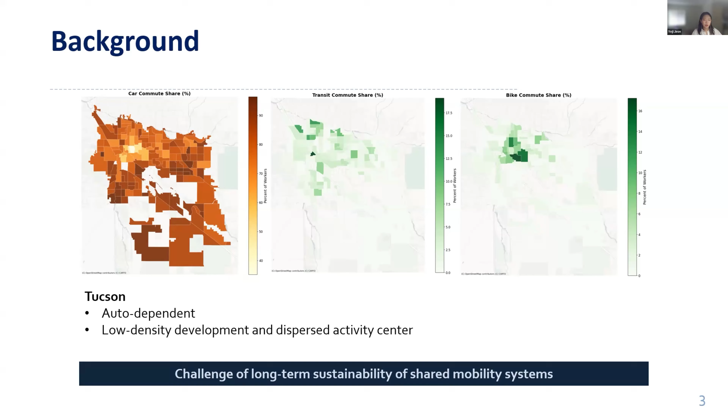So relative to this, we can see that our city is characterized as very auto dependent, and we have low density development and dispersed activity centers. When I want to go somewhere, it usually takes like a 20 minute drive. So we can see it's a really low density development city. So this brings up a challenge of long-term sustainability of shared mobility systems.

And then we did some literature review on how other studies have explored this new pricing plan, especially casual pricing plan introduction. And we found a research gap: prior studies were mainly focused on economic benefits and immediate travel behavioral effects of pay-as-you-go using simulated or survey trip data. And after we reviewed our data, we found we can contribute by examining the impact of pay-as-you-go on user loyalty using observed data, reflecting sustained service participation by using each person's trip history.

So to do this, we have to collect different data sources, because we do not only want to measure just the pay-as-you-go introduction, but we also wanted to see other different attributes. So we got this multi-source data, and we categorized it into three different factor categories. First is internal factors, which are more about operational factors.

The first variable is whether the user was introduced before pay-as-you-go was there or not. The second one is the history of their travel before COVID. Then we wanted to see the average trip cost, and whether the person ever used a subsidy-based pass type. The second category is geographic built environment, such as multimodal accessibility.

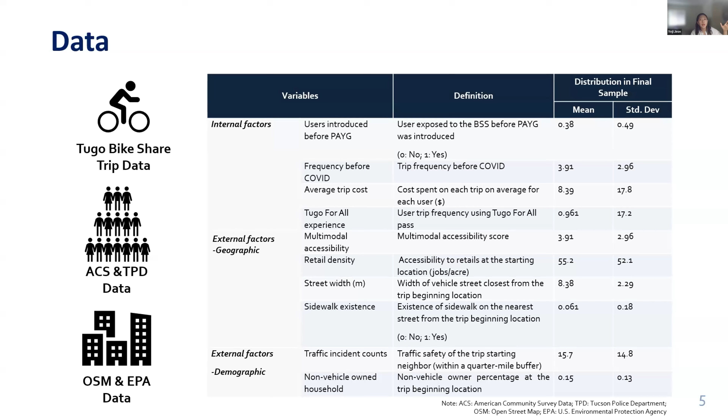So with this, we ended up with these variables, but when we first initiated the data set, we had around 200 variables. We tested with the p-values and then selected this set of variables as statistically significant variables. With this data, we first wanted to see what the pattern and the overall data look like. First, we looked at the monthly pattern of trips and user counts.

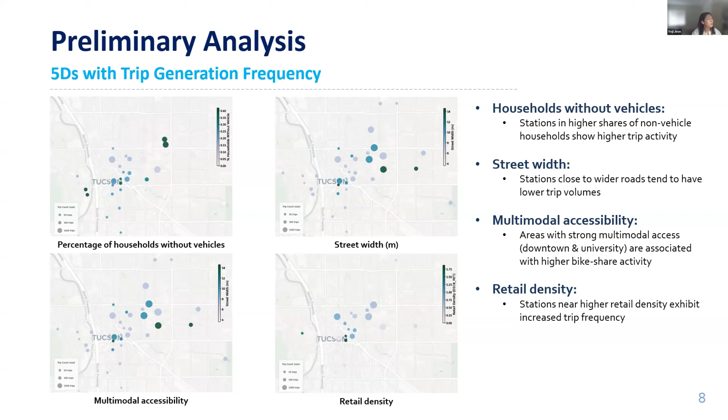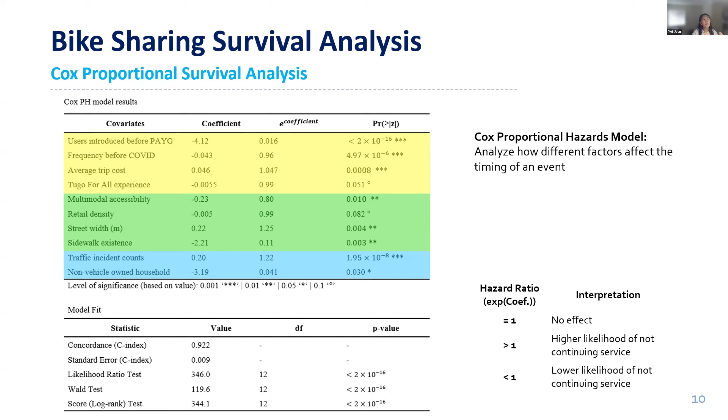So in conclusion, our research contributed by introducing user retention as a key outcome compared to the immediate effect of a new pricing plan introduction. We wanted to see more of user retention, how people survive, by observing their travel history. And in bike-sharing policy evaluation, using the Cox proportional hazards model with integrated multi-source data.

And we found that users who joined before pay-as-you-go was there tend to show more sustained usage. They were more likely to survive inside bike-sharing systems. And pay-as-you-go effectively attracted new users, but mainly functioned as an entry mechanism. However, although that part is still small, we saw the potential that pay-as-you-go introduced users were actually becoming long-term users. So we still see the potential, and it successfully attracted new users.

And by examining different factors in different categories, we found that operational, demographic, and built environmental factors should be integrated together to encourage sustained bike sharing usage.

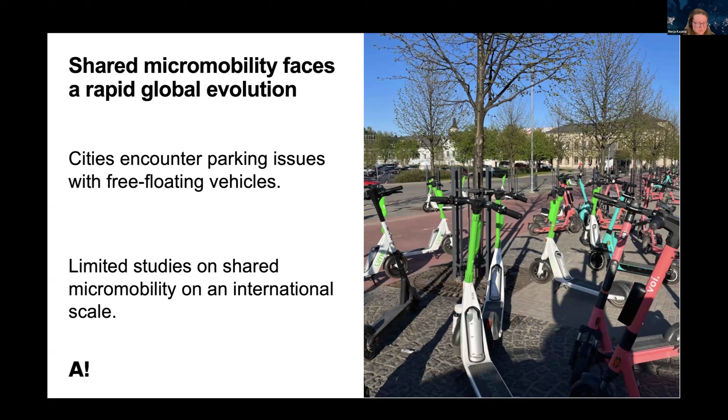There are limited studies on shared micromobility on an international scale. Our study tries to get a better understanding of this evolution of shared micromobility and its relation to technological diversity. We try to analyze and identify what trends are emerging internationally in different markets, and also see what similarities and differences exist between these micromobility services in different countries.

Let's first take a look at the key components in the shared micromobility ecosystem. First, there is an operator that manages one or more micromobility services in specific regions — that can be a municipality, an urban area, or even a nationwide area. A micromobility service in a specific location may offer one or more vehicle types to be rented, and these vehicles can be parked in, for example, docking stations, or they can be free floating, or some kind of hybrid form.

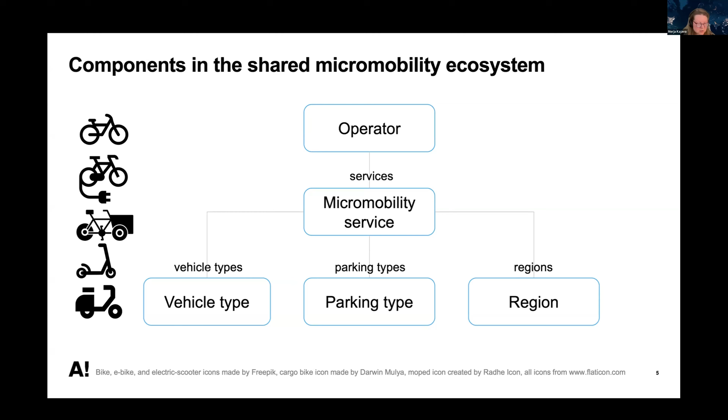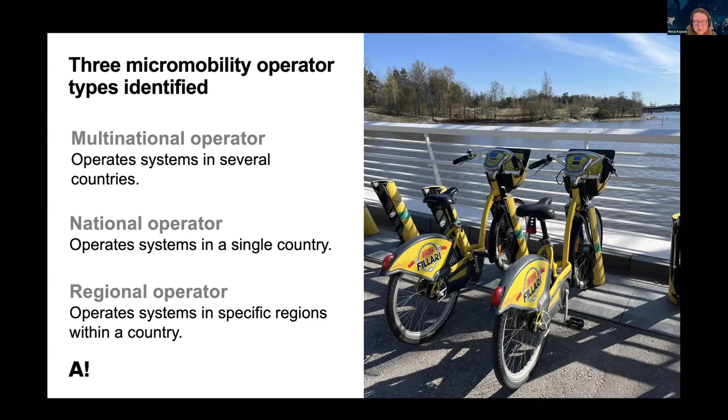First, the multinational operators that manage systems in several countries, and in this dataset, even in several continents. Then we have national operators which operate systems within a single country. Some national operators are affiliated with railroad companies, for example in Germany and the Netherlands. And the regional operator manages locally in a specific region, and this is the largest number of operators in this dataset.

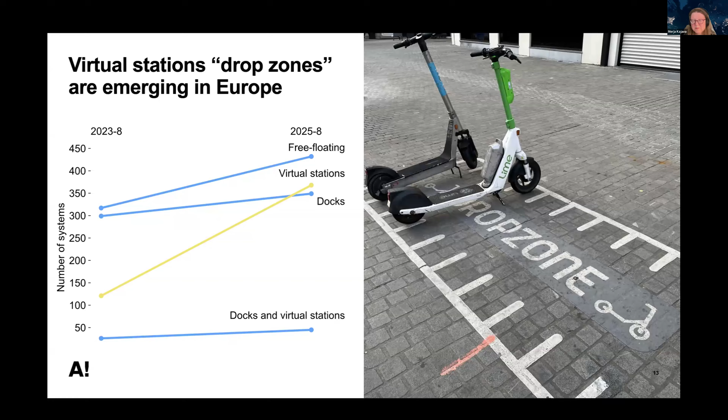In summary, the technological diversity is increasing when considering the vehicle types, with bicycles, e-bikes, e-scooters, cargo bikes, e-mopeds. Some systems even had hand bikes and tricycles. And the parking types are now not only the docking stations or free-floating vehicles, but now the virtual stations are one possible way of managing the parking.

As a result of this study, we have a couple of policy recommendations, for the public and private stakeholders. When planning a tendering process, cities could also consider additional vehicle types, such as cargo bikes and e-bikes. Cargo bikes especially for household last mile logistics, and e-bikes for longer commuting trips.

And the virtual stations provide a very cost-effective way to reduce parking issues in city centers. This was also taken this summer in Oulu, and you can now see that the virtual station has really improved the parking situation, so it's possible to cycle again on this cycle lane.

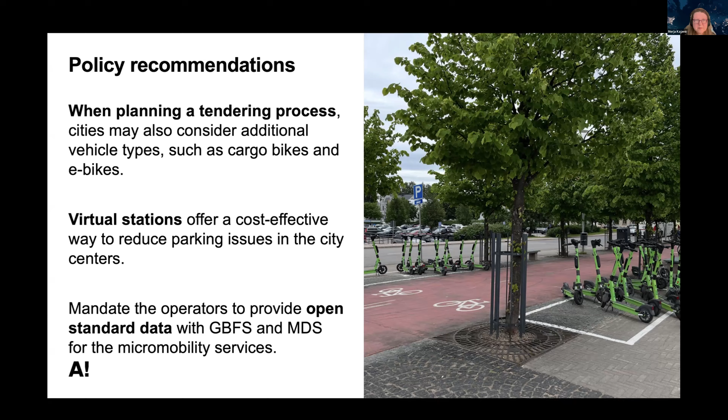Thank you very much, Marja, for your presentation. We have a question in the chat: is there any evidence of increasing numbers of adaptive shared use bikes for people with disabilities?

This is a very good question. It was actually surprising to find that shared micromobility systems even provide hand bikes, which means you can add an extra bike in front of your wheelchair. But this is very marginal right now, though it may be slowly coming into place.

Thank you. Is there any other questions? You can raise your hand and ask the question or put it in the chat. So I have two questions. Thank you very much, because this comparison between different countries is interesting.

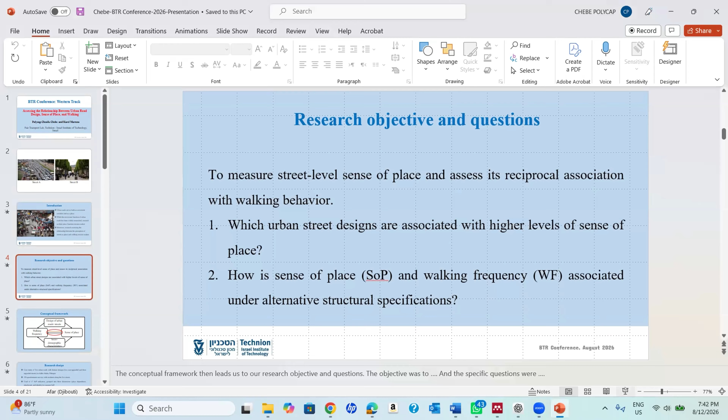I don't know whether you can see my slides. Yes, it's okay. Please go ahead. Hi to everyone, I'm Polycap Chebe, a PhD student at the Technion Israel Institute of Technology under the supervision of Professor Karel Martens, who is also co-author of this presentation. I will be presenting on the topic of assessing the relationship between urban road design, sense of place, and walking, which is part of my PhD research.

Now back to my research. As we all know, urban roads serve both as movement corridors and as places for socialization and other economic activities, and in most cases the design of urban roads will determine which of these functions is prioritized. From research, we were made to understand that while there is large-scale research on how roads serve as mobility corridors, there is limited research on how roads function as places.

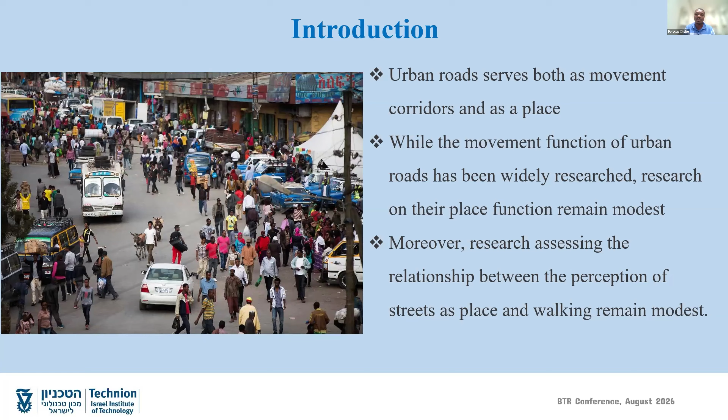This background was very important to us in framing our research, which seeks to measure street level sense of place and assess its reciprocal relationship with walking behavior, with two questions: first, which urban street designs are associated with high levels of walking and sense of place; second, how is sense of place and walking frequency associated under different alternative structural specifications.

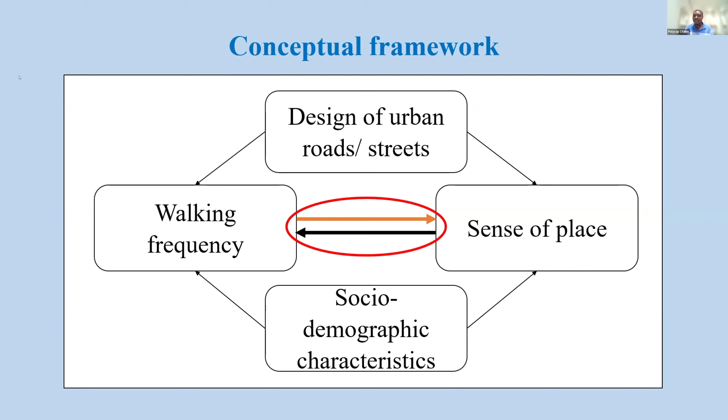From these questions, we came up with a conceptual framework showing that the design of urban roads influences both walking frequency and sense of place, while controlling for socio-demographic characteristics. Research has already shown an association from sense of place to walking frequency, but the question is whether walking frequency is also associated with sense of place.

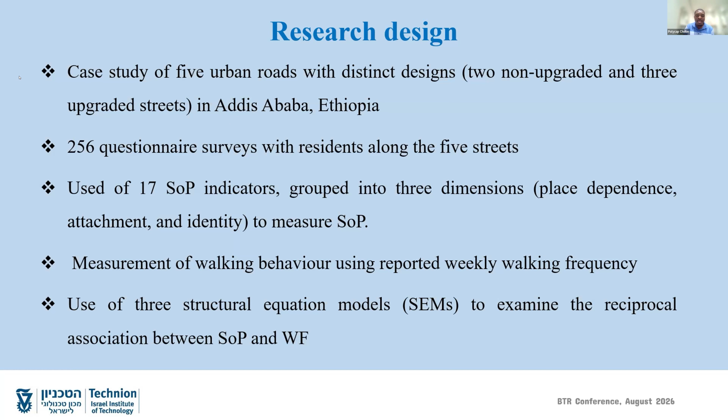To address this, we adopted a case study approach of 5 urban roads in Addis Ababa, 2 non-upgraded streets and 3 upgraded streets. We conducted a survey with over 256 respondents living along the 5 streets. We used a 17-scale sense of place dimension grouped into 3 dimensions: place dependence, place attachment, and place identity. We measured walking frequency in terms of reported weekly walking frequency, and finally used 3 structural equation models to examine the reciprocal association between sense of place and walking frequency.

For the first model, we specified sense of place as a first order dimension with 3 variables - place dependence, place attachment, and place identity - directly estimating walking frequency while controlling for street category, included as a proxy for land use activities, and socio-demographic characteristics.

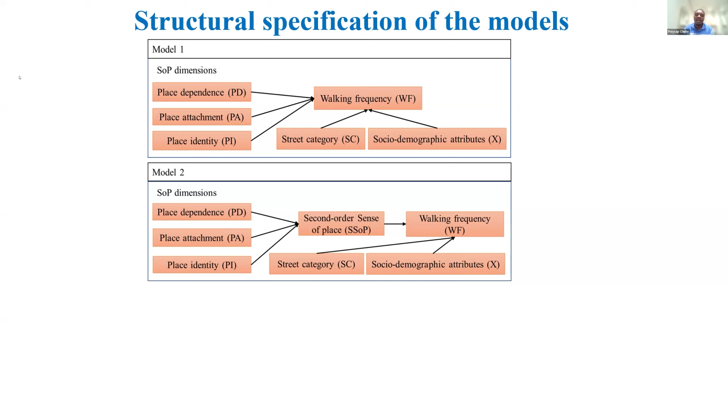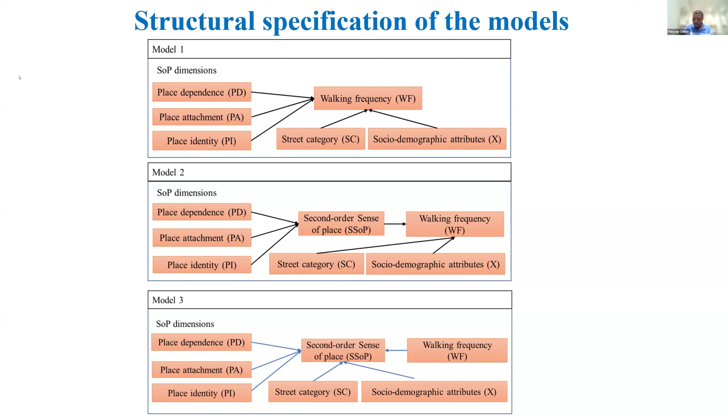In the second model, we specified sense of place as a second order latent variable estimating walking frequency, still including street category and socio-demographic characteristics as control variables. In the third model, we reversed the structure by looking at the association from walking frequency to sense of place, still controlling for street category and socio-demographic characteristics of the respondent.

For the sense of place tool, we had 3 measurable dimensions: place dependence with 5 indicators, place attachment with 6 indicators, and place identity with 6 indicators. These indicators were drawn from existing literature, particularly the work of Jorgensen and Stedman, who have widely researched sense of place, along with other associated studies.

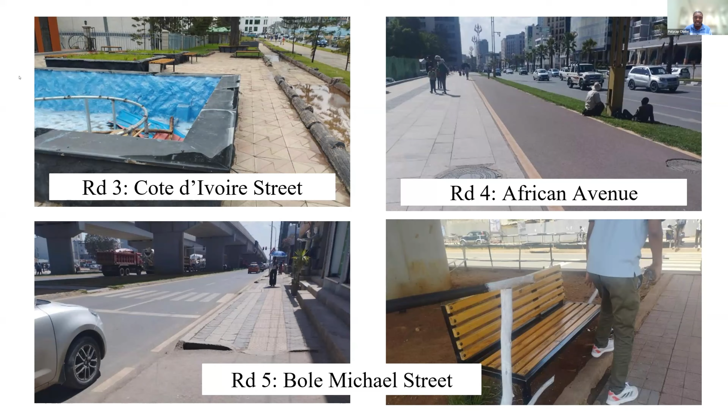For the upgraded streets, we had 3: Côte d'Ivoire Street, locally known as Megenagna; African Avenue Street, locally known as Bole Street; and the Bole Michael Street, which was recently upgraded with a flyover section and some chairs provided underneath the flyover.

For the descriptive analysis results, we first observed significant variations in sense of place score across the different selected streets and neighborhoods. But looking closely, we found no significant variation in sense of place score between each street and its associated neighborhood.

Among the different streets, the one with the highest sense of place score was African Avenue Street, an upgraded street. Interestingly, the street with the lowest score was also an upgraded street, Côte d'Ivoire Street. For the 3 dimensions, place dependence consistently scored lower compared to place attachment and place identity.

For walking frequency, we observed that there were no significant variations in walking frequency across the five streets.

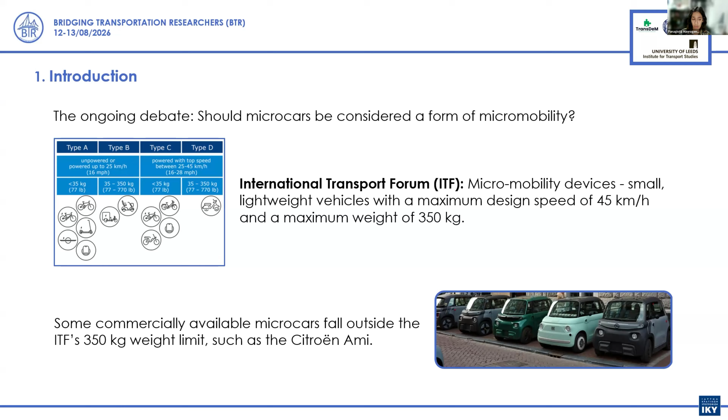There's an ongoing debate on whether microcars should be considered a form of micromobility. According to the International Transport Forum, micromobility devices are lightweight vehicles with a maximum design speed of 45 kilometers per hour and a maximum weight of 350 kilograms. Most famous commercial microcars, such as the Citroën Ami or Microlino, fall outside of the ITF's weight limit. However, there are others, less known, that meet or closely align with these thresholds, supporting the inclusion of microcars in the micromobility definition. You can see in the table 4 examples with the weight, the maximum speed, and the seats that the car has.

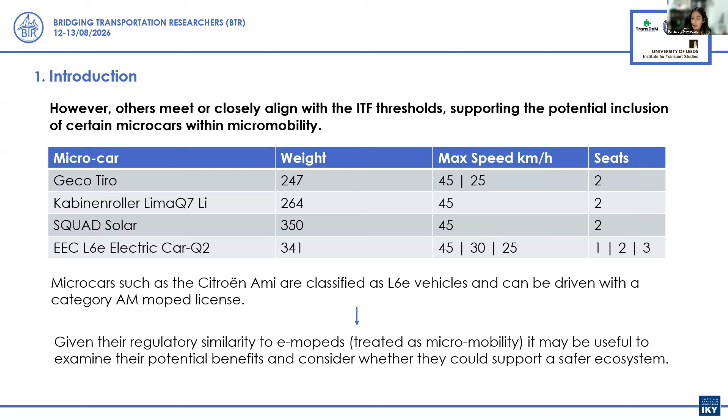In addition, even the most famous microcars that fall outside of the threshold, such as the Citroën Ami, are classified as L6E vehicles and can be driven with a moped driving license, not a car driving license. So, given that some microcars fall into the ITF definition of micromobility, and their regulatory similarities with mopeds that are already treated as micromobility, we considered that we should examine the potential benefits of including microcars in the wider definition of micromobility, and examine how microcars could help support a safer ecosystem.

This work also focuses on mobility hubs. A mobility hub is a clearly identifiable area where different public and shared transport modes are brought together and connected to increase accessibility and improve users' experience. In our case, we defined micromobility hubs as permanent, designated areas that integrate shared micromobility services with public transport. So we exclude services such as car sharing, ride-hailing with Uber, for example, or taxis. We focus on short distances and first and last mile connectivity, and we examine users' evaluation of micromobility hubs as a distinct system and not as a component of a wider mobility system. We examine how infrastructure, safety, and users' characteristics jointly influence users' mode choice, and users' preferences and trade-offs relevant to the design and implementation of such hubs.

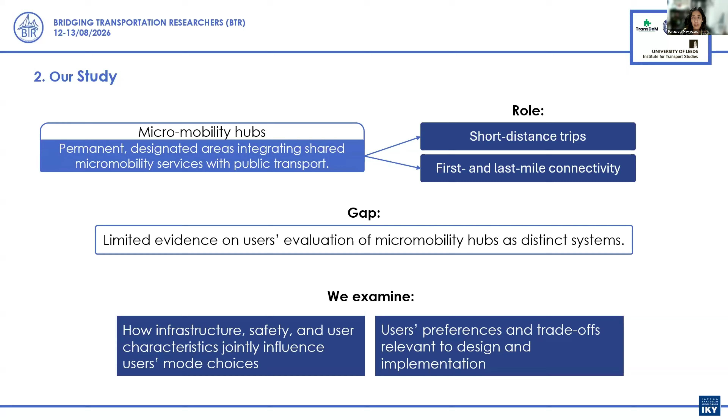Our study started, of course, with a literature review in order to identify gaps, define the research question and the survey design. We proceeded with the survey design, in which we included stated preference experiments, a travel behavior diary, perception and attitudes, and of course demographics.

In total, we used 3 different data sets for our model. We used the survey data, some OpenStreetMap data for cycling infrastructure data, and road accident data. All these 3 components were combined into our final model estimation.

For our stated preference experiment, at first the scenario was presented to the respondents. More specifically, we showed them the trip purpose, the weather conditions, and the area and the speed limit for their area. And we asked them what mode they would usually use for such trip. And then we also asked them whether they would consider using a micromobility hub for their trip.

Those that responded yes were shown the Micromobility Hub choice task, while those that responded no were shown an alternative choice task that was related to public transport services and some shared services in the city. So this process was repeated across all 6 choice scenarios, resulting in some individuals answering more Micromobility Hub scenarios and fewer public transport scenarios, and others the opposite.

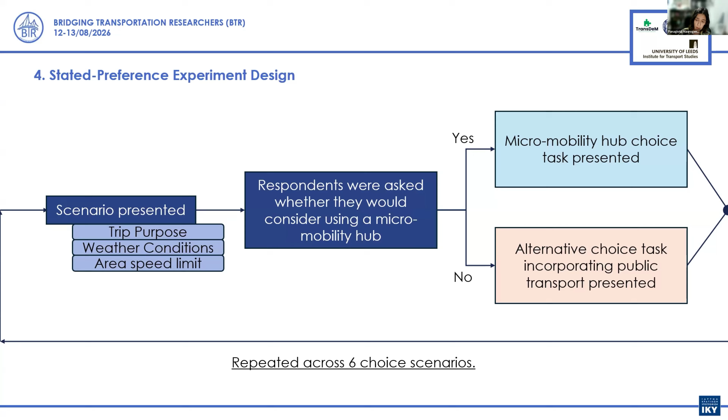In this presentation, we focus only on the Micromobility Hub choice task, and the public transport choice task is not examined at all. Here you can see the attributes of the Micromobility Hub experiment. We examined waiting time, travel time, walking time to the final destination from the final station, cost, bike lane existence in the trip, charging level of each vehicle, and some additional features such as the provision of helmet, SOS buttons, etc.

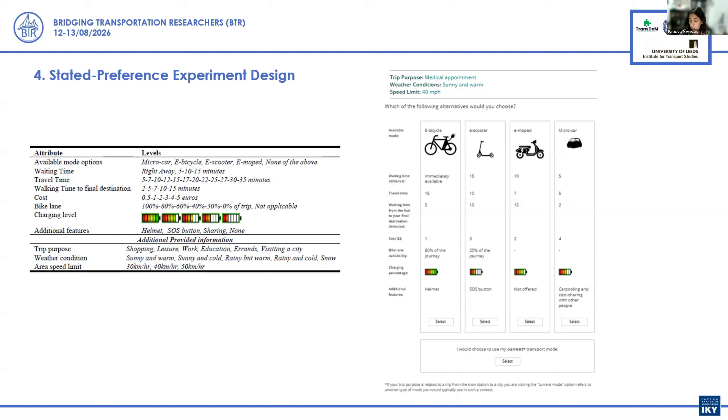And also for the additional provided information that was shown in the beginning and was fixed for all modes: the trip purpose, weather, and the speed limit. You can see for trip purpose, we examined shopping, leisure, work, education, errands, or visiting a city. On the right, you can see a screenshot from our stated preference scenario. In the final option, people could actually say that they would choose their current transport mode.

So in the end, we collected 500 questionnaires, 500 respondents. We used quotas on age, gender, region, and income. For the hub stated preference scenario, we had 346 respondents participating in at least one scenario, answering that they were open to use a Micromobility Hub in at least one of the scenarios presented to them, and in total we had 1,387 choice observations. Gender and age, you can see in the diagrams, follow the UK distribution since we did use the quotas for these variables.

75% of our sample were employed, only 6% of our sample were students. You can also see the distribution of education, with 34% holding a university degree. And you can also see the distribution of our sample in different regions that also follow the UK distribution due to the quotas used in the survey. We also asked them about their physical activity. You can see that 65% did state that they exercise often during each week.

And we included some indicators on Micromobility Hub attractiveness for each respondent. Some statements about whether they believe a Micromobility Hub will help with the economy, the sustainability of the area, parking spaces, safety of pedestrians and cyclists, accessibility and connectivity. The scale was from 1 to 6. You can see that most of the answers are around 5, closer to 5, closer to 4.5. So the opinion was quite positive.

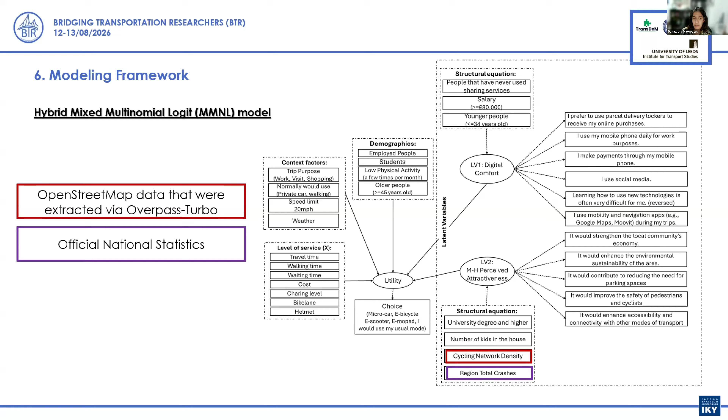And for our 2 latent variables, the structural equation for the digital comfort latent variable was related to previous shared service usage, salary, and age, while for the perceived attractiveness, university degree, the number of kids in the household, cycling network density in your area, and the regional total crashes. For the cycling network density, we utilized OpenStreetMap data extracted via Overpass Turbo, while for the regional total crashes, we used official crash datasets from the official national statistics of the United Kingdom.

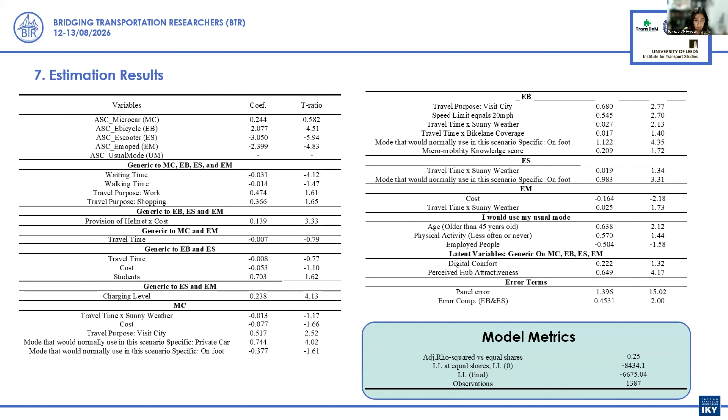To have a more complete presentation, I've also added the model estimation table. The rho square for our model was 0.25, and the observations, as I said before, were 1,387 observations. If anyone wants to return to this table, we can return.

I'll make a cleaner slide later. Also, the latent variables, metrics about the latent variables, the measurement and the structural equation parts of its latent variables. So for a cleaner presentation, I'll present the results in this slide. If anyone wants, we can show the previous slides again. So waiting time reduces the likelihood of choosing all hub modes.

Travel time showed the expected negative direction, but wasn't statistically significant. Helmet provision was positively influenced when considered alongside the cost of the trip. Higher charging level increased the preference for e-scooters and e-mopeds. Older respondents were more likely to return to their usual mode of transport, while visitors to a city were more likely to choose a microcar or e-bicycles.

Something alarming that came up from our model: as I said when I was describing the stated preference experiment, in the beginning we presented them the scenario and asked them what mode they would normally use to perform that trip in their usual life. Respondents who would otherwise walk were more likely to choose e-bicycles or e-scooters, which is quite alarming since we don't want to shift short walking trips towards motorized modes. So hub design and implementation should carefully address the substitution risk, and it's worth further examination.

Hello, everyone. Hello. Hello. Glad to... oh, that's the wrong one. I thought I had it all ready to go. Fortunately, we have saved some time with the previous presentation, so don't worry. It's filling up my screen, so I can't find the... Maybe Saurav can share your presentation, and you can ask him to change the slides whenever you want. There, I've got it here. Okay. It's just that when Zoom is on, Zoom covers part of my desktop, so I can't see. Okay, now it should be good, right? Yes, perfect. Thank you.

All right. Hello, everyone. I'm Peter Furth from Northeastern University. I did this research together with a PhD student, Nathan David Obeng-Amoako, who's also listening. We're looking at level of traffic stress now at intersections, which includes some interesting dual graph network modeling.

Where we do this research, I think everybody who's involved recognizes that getting people to ride bikes as an everyday way of getting around is good for people, good for the planet, good for cities, for the reasons I've shown and many others.

But in most places, the main thing that stands in the way of people using bicycles every day is traffic. Automobile traffic makes it stressful and dangerous to ride a bike.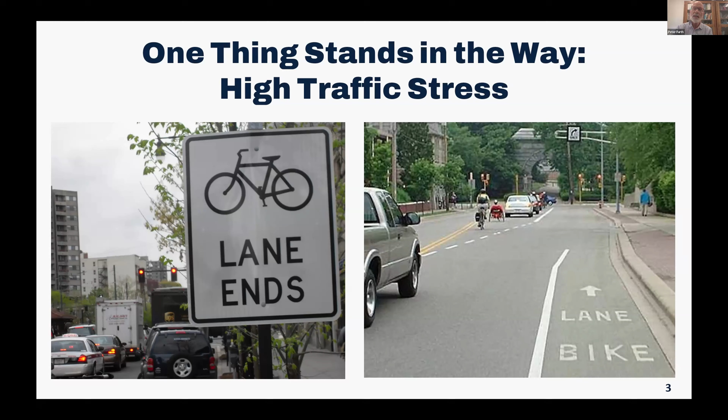So to help understand this and research it more, a little over 10 years ago I developed level of traffic stress as criteria: low stress, and levels of traffic stress 1, 2, 3, and 4. Level of traffic stress 1 is meant for children and some adults, where you don't interact with cars at all, except at crossings like driveway crossings or intersections. Level of traffic stress 2, which most adults can handle, you have your own space and don't really have to interact with fast-moving traffic. Level of traffic stress 3, you have your own space, but now you're dealing with faster multi-lane traffic. And level of traffic stress 4, you're thrust into mixed traffic on a multi-lane or high-speed road.

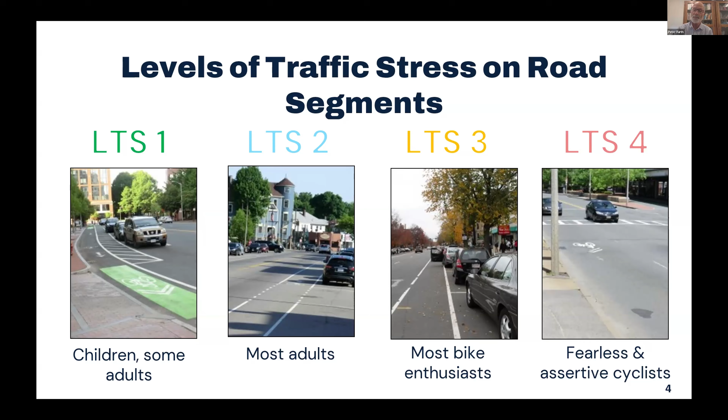And not many people are willing to do that.

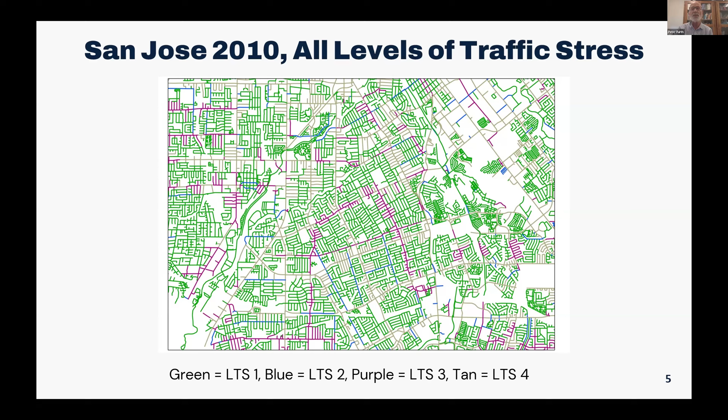Looking at traffic segments in our past research, classified by the 4 levels of traffic stress, here's a map of part of San Jose, California, showing different levels of traffic stress according to color. If you're willing to ride on all 4 levels, the whole city is yours—you can ride anywhere. But if you aren't willing to ride where the level of traffic stress is 4, and I erase that level, that's the network you have. Now you start to see gaps—islands you can't get from to anywhere else in the city unless you're willing to ride on that level of stress 4.

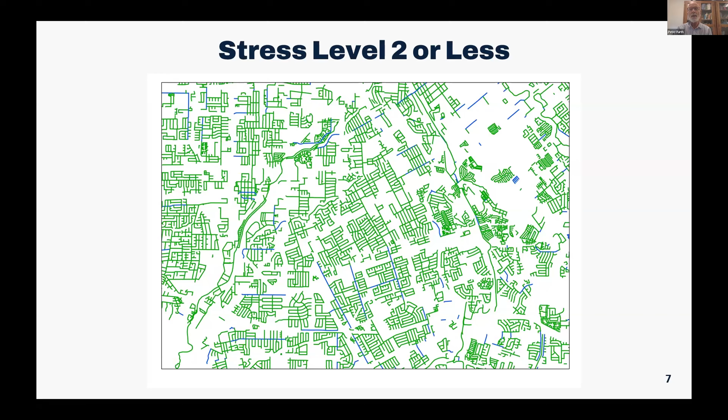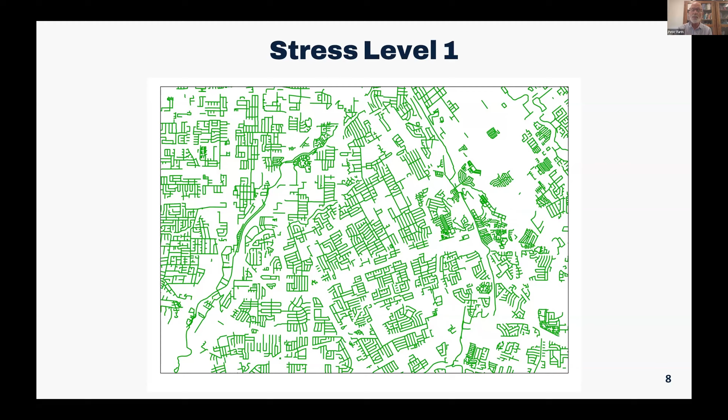If you only want to handle level of stress 2, the gaps and islands become more severe. At level of traffic stress 1, even the most... you can see, all over the city, what can you do? You can leave your home, ride around a couple streets in your neighborhood, and just go right back home. You can't get anywhere—your accessibility to destinations is almost zero.

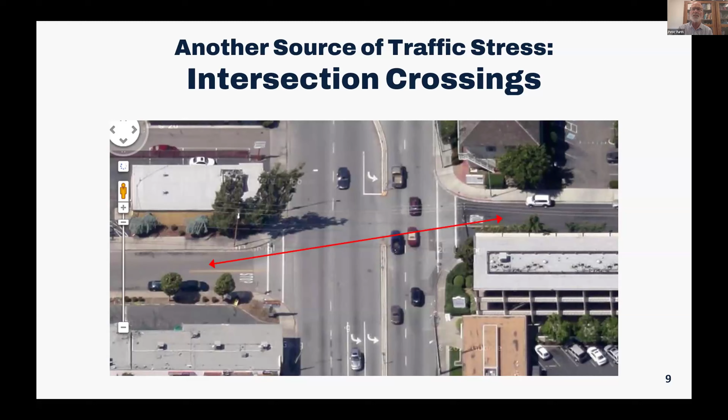So we wanted to do a more systematic study of how intersections have traffic stress. The three research tasks we took on are: first, we need criteria for intersection traffic stress—what makes a crossing level of traffic stress 1, 2, 3, or 4? Second, we need a network analysis that accounts for stress at intersections, because most networks put the cost, the stress, on the links, not the nodes—but intersections are nodes, so how can we account for that? And third, in case studies, we want to answer just how significant a barrier intersection traffic stress is. If you've already accounted for segment traffic stress, how much of a difference do intersections make in keeping people from having a low stress ride to their destinations?

So first, on to the criteria. At intersections that are signalized, the crossings are pretty easy—in my country anyway, in the United States, most places where there's a signalized crossing have a provision that makes it safer for pedestrians to cross, and if pedestrians can cross, usually bikes can too. But there are still some conditions under which it's higher stress, and we call those triggers. The first one is crossing distance.

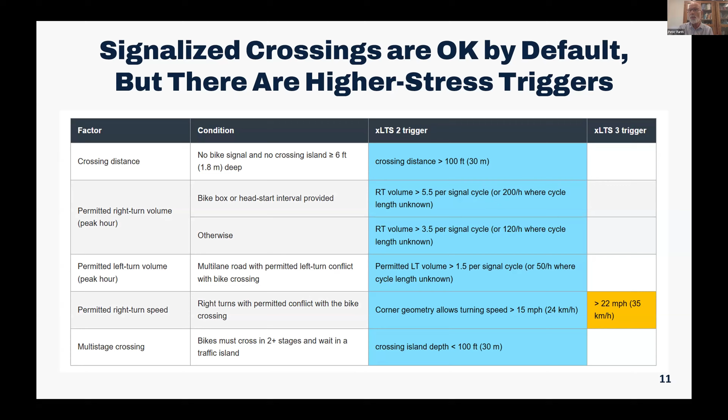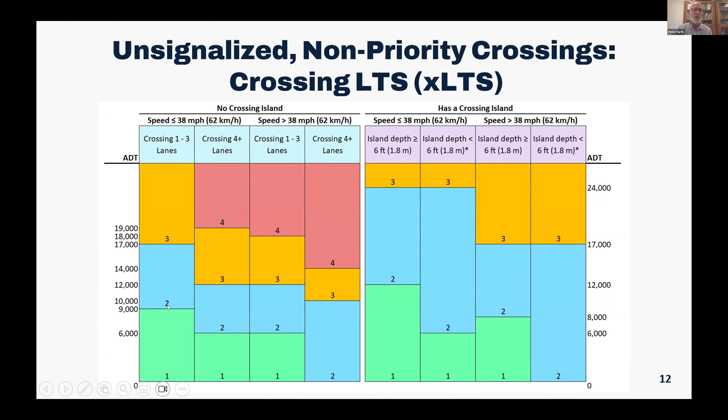To come up with the parameters for these crossings, we didn't do a behavioral study asking people about their feelings of stress—there are problems with doing that, and we didn't have the budget. Instead we used a gap acceptance model that allowed us to have consistent parameters. We looked at three user classes: children, most adults, and bike enthusiasts. They have different speeds, different startup offsets, different tolerable post-encroachment times. The gap acceptance model gave a maximum average delay, and we imposed a limit, which gave us consistent criteria. Stepping back to the previous slide, that's how we came up with these volume limits—acceptable under certain conditions for level of traffic stress 1, whereas if you're over 9,000 cars a day, you're up at level of traffic stress 2, and so on.

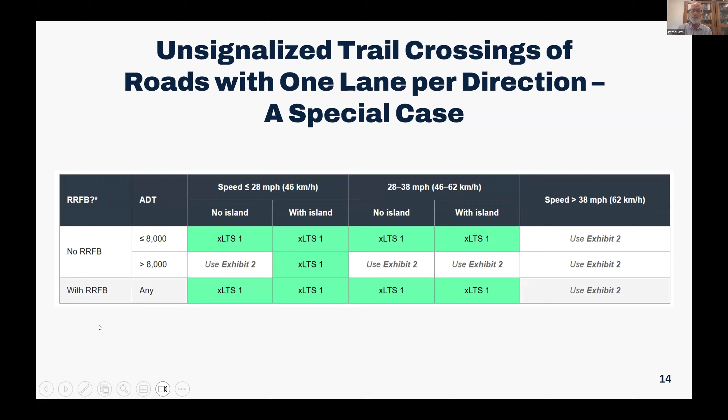Another special case: when there are trails—meaning a bike path not alongside a road but completely on its own—crossing a road, you can get a pretty low stress crossing because cars will stop for you if the speed is low enough. It depends on speed, whether there's an island, the traffic volume, and whether there's a rectangular flashing beacon. Those were most of our criteria.

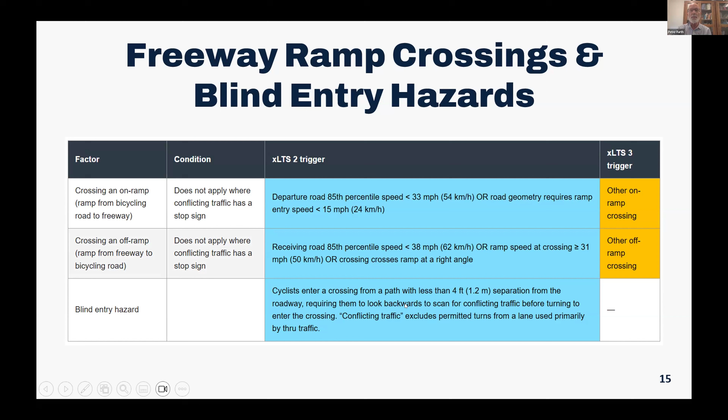Then there are some special cases for freeway ramp crossings. Everybody understands when you're riding on a road and suddenly there's an on-ramp to a freeway—cars just zoom across. It's so stressful crossing those, so crossing on-ramps and off-ramps are triggers. There's also a trigger from a blind entry. Here along Saulsbury Road, there's a bike path, but because it's right at the curb, when you turn to enter the crossing you don't have a chance to see conflicting traffic except by looking behind you. Looking behind you is difficult, and people lose their balance or fall when they do. So I call that a blind entry, and it makes for a higher stress intersection.

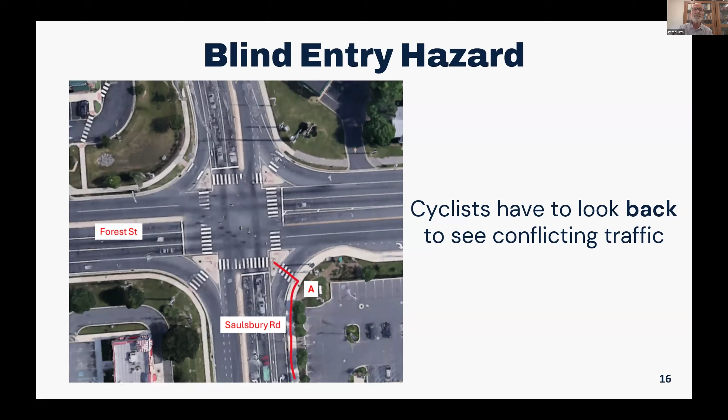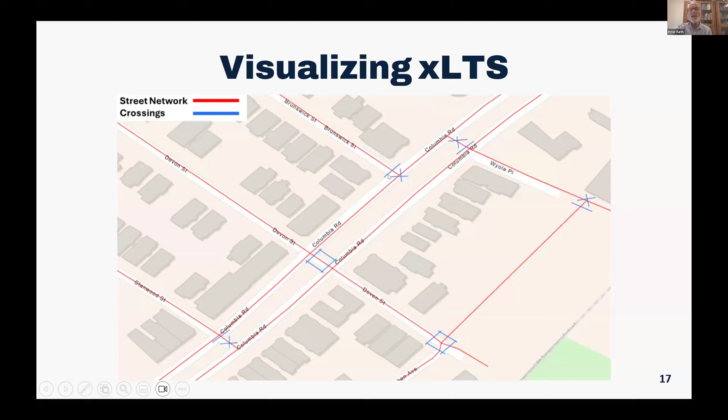At a 3-leg intersection, you see here the 3 crossings. This is the crossing across the bottom of the stem. There is no crossing across the top of the stem, so there's no crossing there. And then what makes an X here, these are the crossings associated with the left turn that you would make going into or out of the side street.

But when it comes to a network analysis, we distinguish crossing stress, X LTS, from movement stress. Movement meaning like a turning movement. So a crossing stress is the stress of crossing a particular leg, whereas a movement stress is the stress associated with making a certain movement. So for instance, at this intersection, when you're making a right turn, you're not crossing anything, so there's no stress making the crossing.

If you're making a through movement, like this through movement going north, you'll be crossing leg 3. So the stress of that movement is the same as the stress of crossing leg 3, which is entirely dependent on characteristics of leg 3, like how many lanes it has, how much traffic it has, whether there's a traffic light, and so on. If you're making a left turn, like the left turn shown here with the purple arrow, you're now crossing 2 legs.

We assumed left turns are made going around the intersection, kind of square, going counterclockwise, like shown here. In other words, cyclists are making a two-stage turn. They have to cross leg 3, then they wait if necessary, and cross leg 0. So they have crossing stress on the first leg, and some crossing stress on the second leg, and the stress of the movement is the maximum of those two, consistent with the way we've done traffic stress on segments.

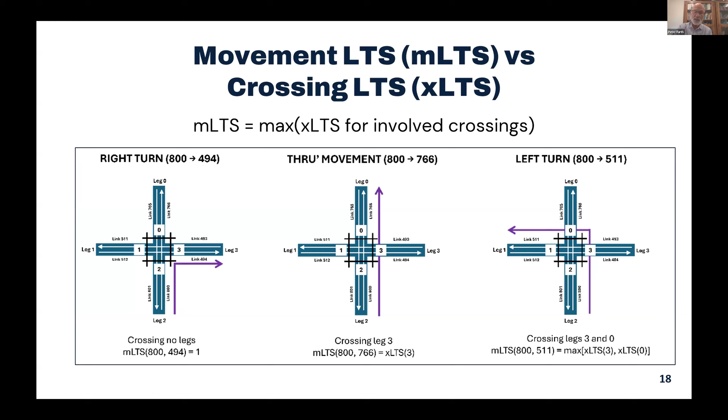Then, in order to get the stress of a movement at a node, which in a usual graph representation has no cost, you can't put a stress or a cost or a restriction at a node. But there is another way of doing this, which is a dual graph representation, which is used in routing for automobiles. It's been used in routing for public transportation, so it can also be used with bicycling.

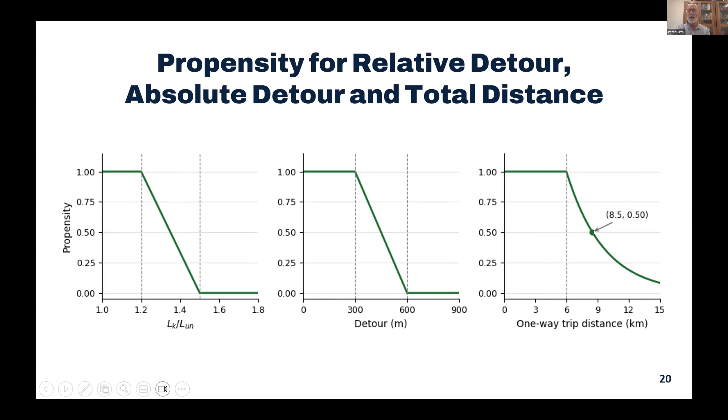For short distances, people are willing to go on a detour of 300 meters, and completely unwilling to go a detour of more than 600 meters, unless it meets the relative criteria, then for longer distance that's okay. And for distance, people are willing to go with no diminution in propensity for up to 6 kilometers, and after that propensity declines with an exponential decay with a half-life of 2.5 kilometers.

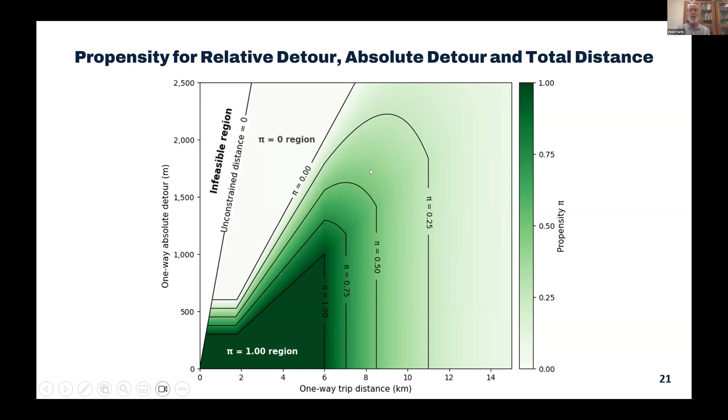We applied this to looking at accessibility to jobs in Boston. We already had, for Boston, a level of traffic stress for segments. So we got all the data we needed to calculate level of traffic stress for every crossing. We then took that to the next level to get the level of traffic stress for every movement. We created background movement links, and then we created the dual network.

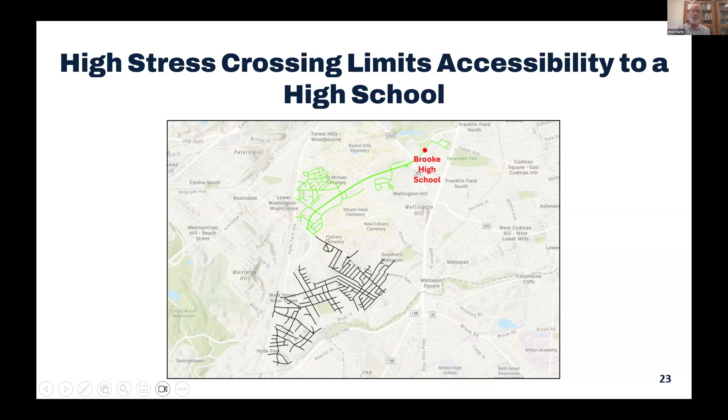But in green, you do have low stress accessibility, and in black, you also have low stress accessibility if you ignore crossings. But there is a crossing where the black and green meet that you'd have to make to get to Brooke High School and back home again if you lived in the southern neighborhood where it's black, and that's a crossing LTS2. So if you account for intersections as a barrier, about half of the area you'd think is accessible to Brooke High School is not accessible. The high stress crossing there is creating a barrier to accessibility.

We also did that looking at jobs. Jobs, of course, are all over Boston, as are homes. The Boston area here includes the cities of Cambridge, Somerville, and Brookline, in case you know Boston, so that's a pretty compact area. Looking at the four levels of traffic stress, if the crossing LTS is not enforced — in other words, ignored — if we just looked at it the traditional way, you'd say almost 1% of jobs are accessible to homes if you're only willing to ride on LTS1 segments, given a certain propensity for detour and distance as I described. But when you enforce crossing LTS, that percentage drops way back.

A lot of jobs that you could get to if you ignored intersection traffic stress, now you can't get to. If we look at level of traffic stress 2, which applies to most adults, a home can get to about 12% of the jobs in the Boston area on average. When crossing traffic stress is enforced, that goes down, not too much, to a little bit below 11%. So the crossings take away some accessibility, but not nearly as much as the segments do. At level of traffic stress 3, there's hardly any difference because there aren't many LTS3 crossings, and at level of traffic stress 4, of course there's no difference because you're willing to ride on anything.

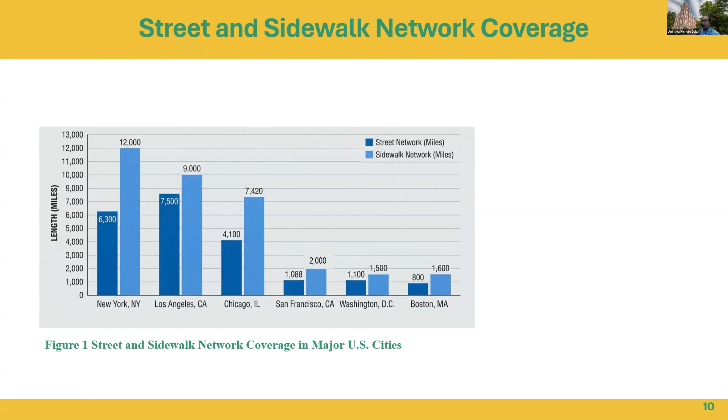However, that simplification becomes risky when sidewalks are sparse in small-scale cities. If we take a look at our study area, Fort Smith, Arkansas, that gives us a strong test of that risk. In Fort Smith, our inventory indicates sidewalk coverage is only about 25% of the total length of the street. If pedestrians can use every street in the model, the walking network becomes far more connected than the real one. That can inflate the baseline against which bike share is judged.

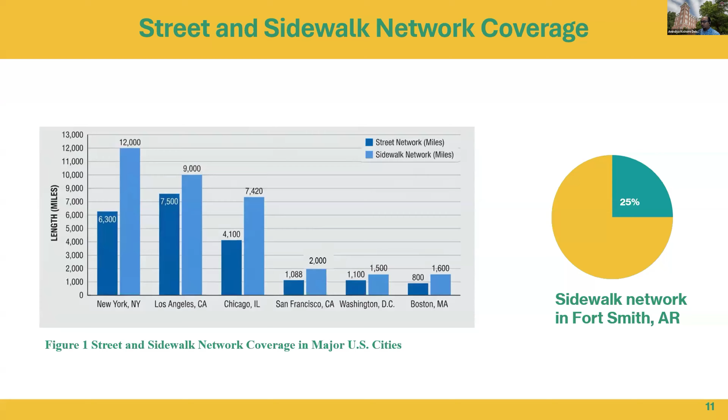And this leads directly to our two study objectives. We tried to contrast accessibility patterns across three different network scenarios: walk only, walk combined with bike, and walk combined with bike and transit. And we also considered two different pedestrian navigation assumptions: one is we let people walk on the street, versus we confined them to sidewalks. And finally, we assessed the accessibility impact of a docked bike share system. To test these questions in Fort Smith, we used the example from Ride 4 SMILIES bike share system.

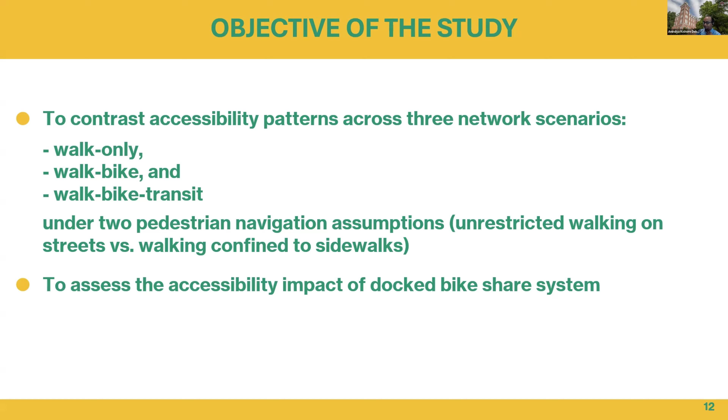Now if we take a look at the study area, that study area combines Ride 4 SMILIES stations, transit routes, and Fort Smith's socioeconomic geography. Bike share stations concentrate around the urban core, where opportunities and household conditions vary over short distances.

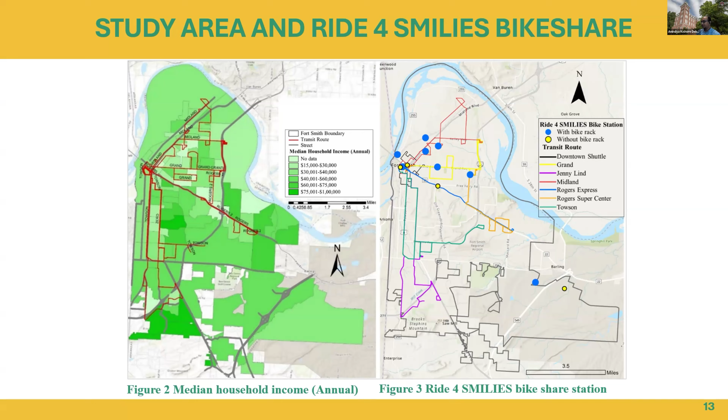Now if we take a look at what kind of data we considered to measure our accessibility. But before that, if we take a look at the performance of the bike share system, the trip data also show that the system serves more than recreation. Recreation dominates overall, but among carless users, shopping and dining rises from about 15 to 22%, and mixed trips from about 5 to 9%. So we can see that everyday access, not just leisure, is therefore relevant in case of small cities as well.

So if we take a look at the dataset we use to measure the outcome, we assembled five different connected data layers, and we begin with jobs and points of interest — any point of interest available on Google API, Street View API. We took this point of interest data into consideration, and eventually converted those destinations into a comparable opportunity index metric. For each census block, we normalize every opportunity category and aggregate the values. The example combines jobs, restaurant, and grocery access, and this creates one cumulative measure without letting the largest raw category dominate.

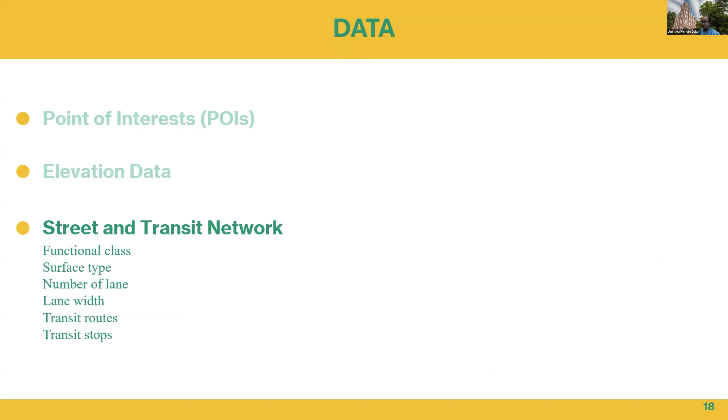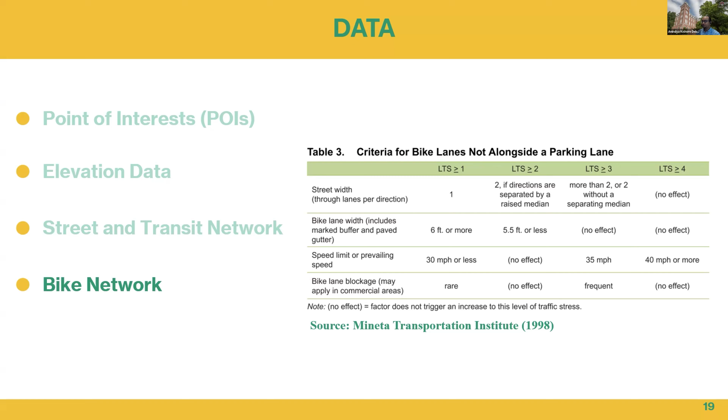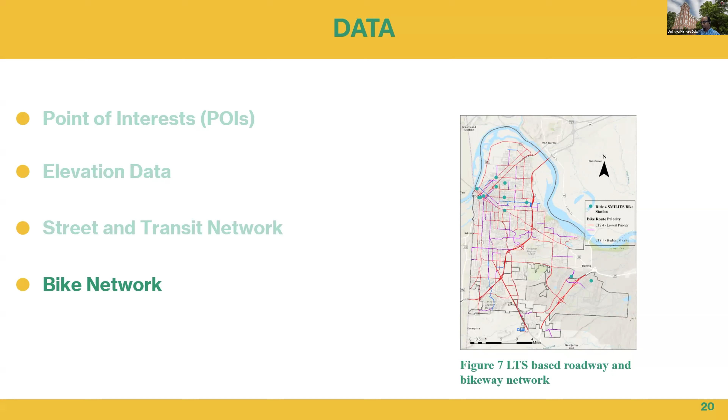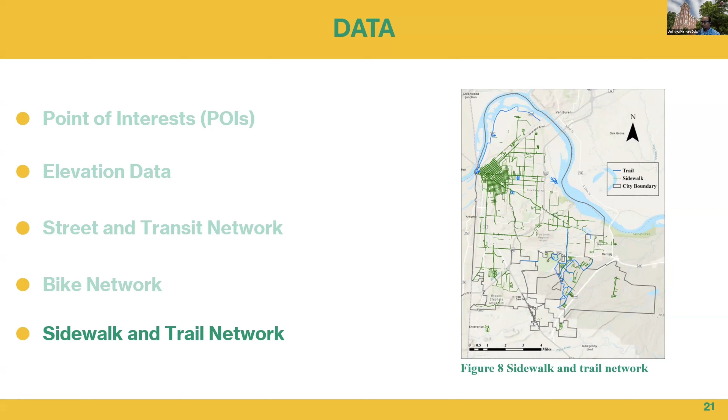And finally, we add the layer at the center of our research question. The sidewalk and trail inventory defines where pedestrian travel is actually permitted in the constraint model. It turns a walking assumption into an explicit network.

Now, with these layers, we construct three door-to-door scenarios. Scenario 1 is a direct walk. Scenario 2 adds bike share between two walking segments. Scenario 3 adds transit to that chain. These are door-to-door journeys, and every multimodal advantage still depends on the pedestrian links connecting the chain.

And we calculate the time for each link rather than using a single generic speed. For bicycling, travel impedance reflects distance, slope, and level of traffic stress. Walking speed is also slope adjusted. So we then include operational realities, for example slower crosswalk movement, a 5-minute transit wait, an average transit speed, and 1 minute to unlock and return the bike.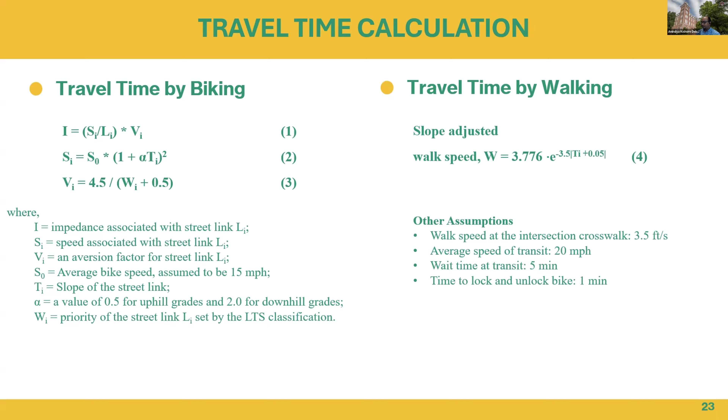These assumptions keep the scenarios comparable and behaviorally more plausible, I guess. And these travel times feed the accessibility measure. For each origin, the sum of the opportunity index of reachable destinations weighted by the travel time impedance. In plain language, more nearby opportunities create more accessibility; longer or harder trips contribute less.

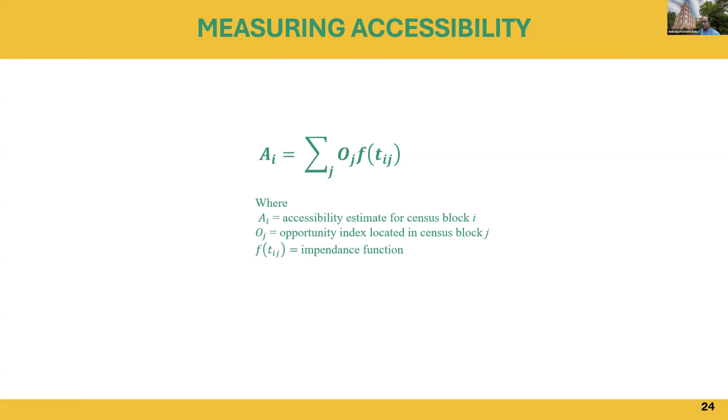Now, if we take a look at the results, we can see what changes when the pedestrian assumption changes. So each map pair here compares the same scenario and time budget. The map on the left allows walking on streets, and the map on the right restricts walking to sidewalks. Across walk only, walk bike, and walk bike transit, and at both 20 and 30 minutes of travel, the sidewalk constraint footprint is smaller. In many of the instances, it is very much smaller and more fragmented.

Multimodal travel still expands reach, but the missing pedestrian links prevent that expansion from spreading as far across the city. So this is something that small-scale cities without enough connected sidewalk networks are likely to experience, even with the addition of different multimodal options.

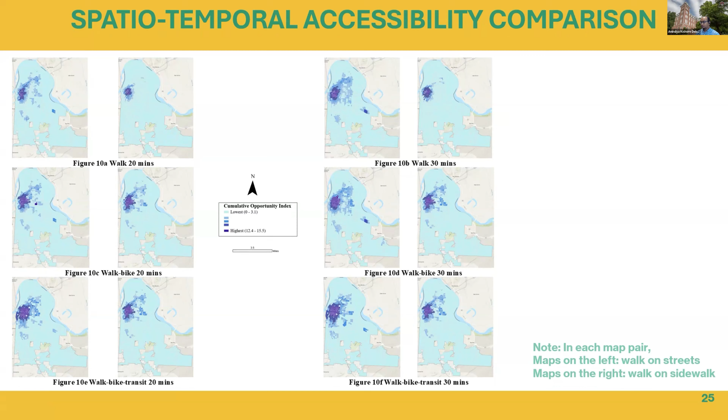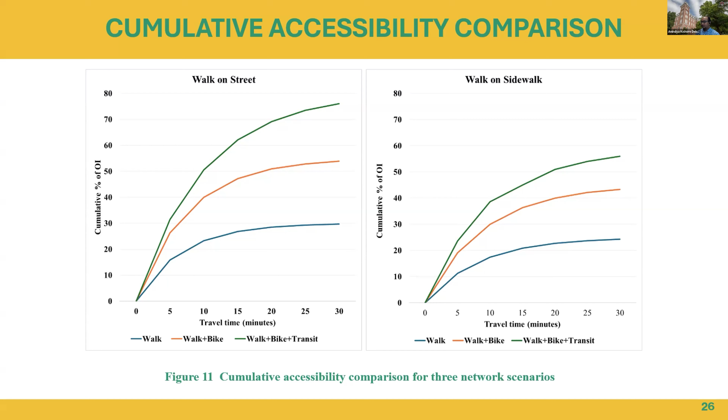Now, if we take a look at the cumulative curves, we can see that on the left, under unrestricted street walking, each added mode produces a larger step up in cumulative opportunity. By 30 minutes, walk, bike, transit reaches roughly 3/4 of the opportunity index. On the right, with sidewalk-only walking, it reaches closer to the mid-50s. The ordering of the modes remains the same. However, the accessibility opportunity level and the apparent multimodal benefit is lower when pedestrian access is realistic.

Now, if we see the impact of bike share on multimodal accessibility, the benefit also varies strongly by location. These curves show opportunity gain relative to walking as distance from the downtown increases. The largest gains occur near the opportunity-dense core, where a short bike connection unlocks many destinations. The gains then fall towards 1 as distance increases. Sidewalk constraints compress the curves and shorten the distance over which bike share creates a strong advantage.

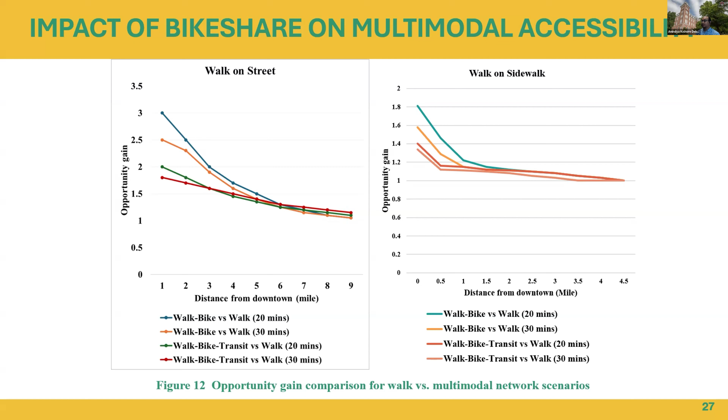So what we learn from here is that bike share station placement and pedestrian connectivity cannot be planned separately, in small cities especially. Bike share performs best when opportunities are dense and the first and last links actually connect. That brings us to that small city resident from the opening. We draw 3 conclusions. First, ubiquitous pedestrian access creates an artificially generous walking baseline. Second, sidewalk constraints flatten measured multimodal benefit. And third, bike share adds the most value in opportunity-dense areas.

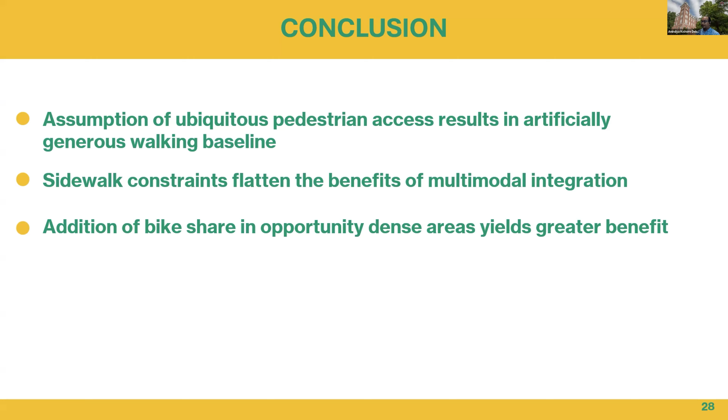And returning to our opening traveler, the decisive question is not whether a bike or bus is nearby. It is whether the traveler can reach it. Bike share is not a substitute for the pedestrian network. Its value is actually activated by that network. A bicycle can extend a trip and transit can accelerate it, but every multimodal journey still begins and ends on foot. If the first or last link is missing, the network on the map is not a network people can use. And thank you.